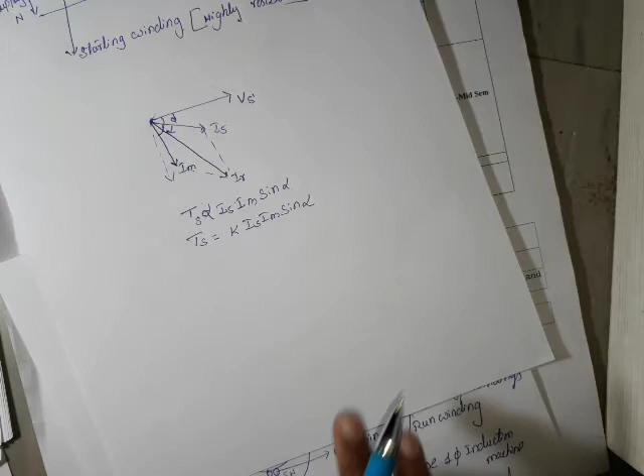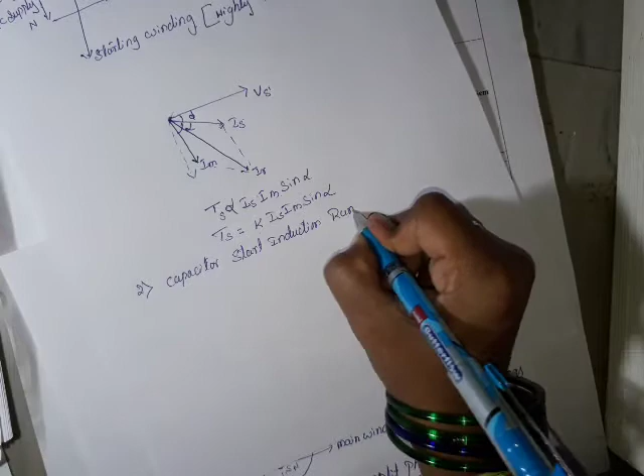So the next type of machine is capacitor start induction run induction machine. It's very simple.

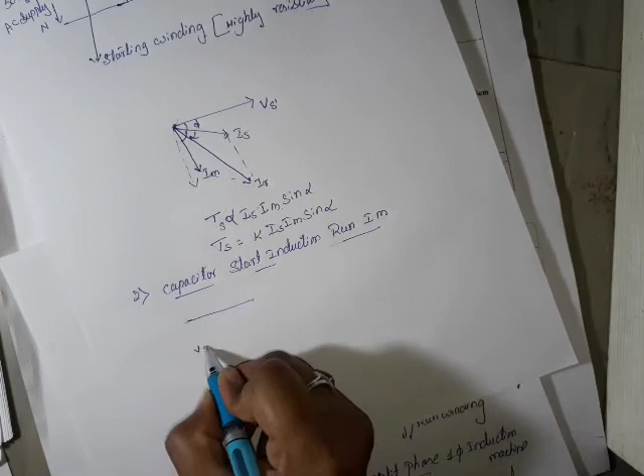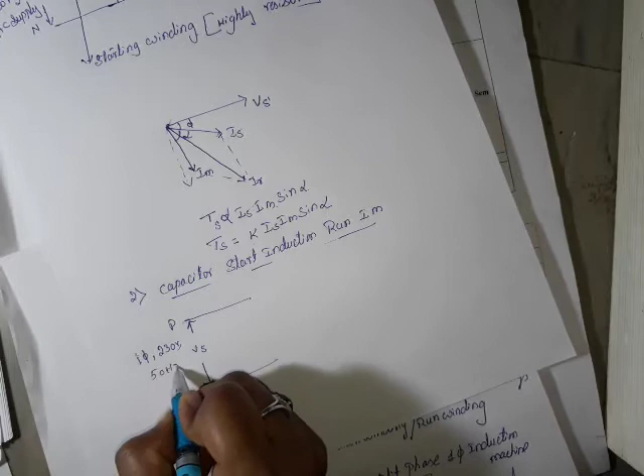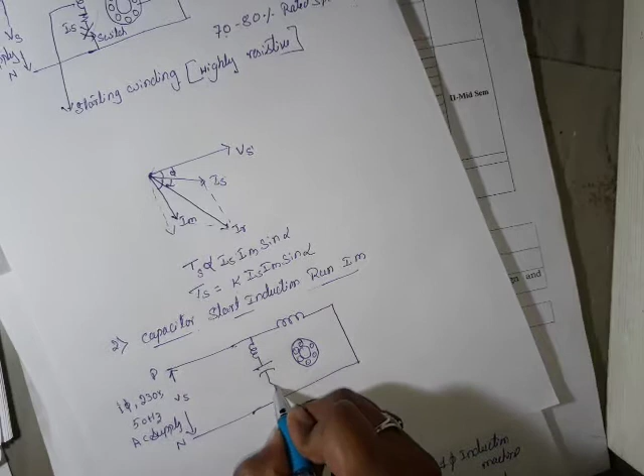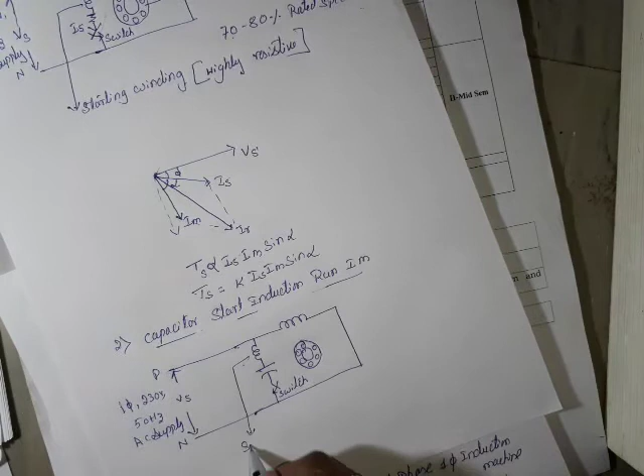First I'll write the circuit diagram. Vs - single phase neutral, 230 volts, 50 hertz AC supply we are going to give. Similar to split phase, here we have main winding, here we have rotor, here we have starting winding, but the starting winding is connected in series with the capacitor along with the centrifugal switch. So this is the switch, this is the starting winding, this is the main winding.

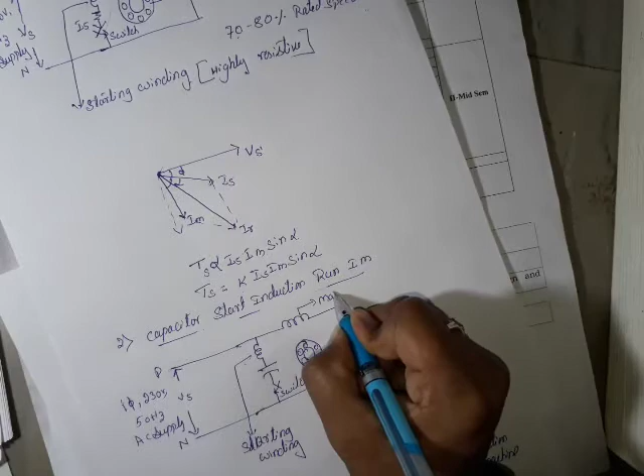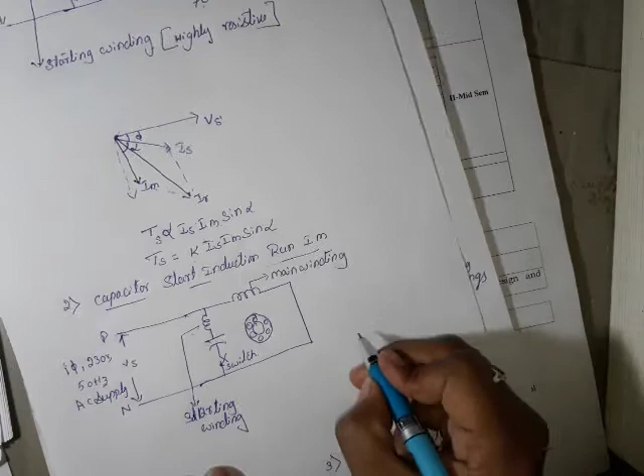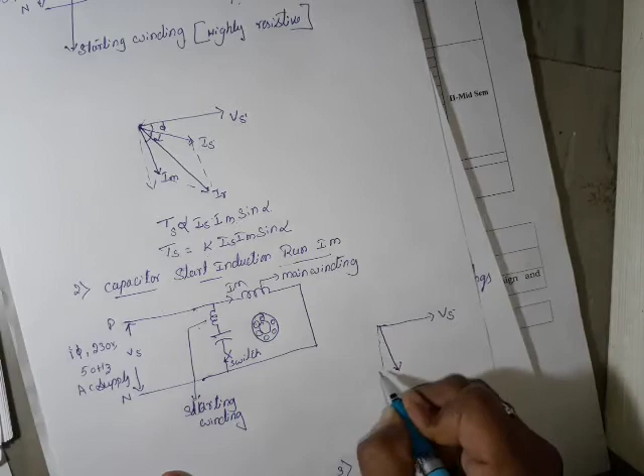Now we'll write the vector diagram so you will understand the working. This is the supply voltage Vs. The current flowing through the main winding is Im. Im is like this, it is not exactly 90 degrees, it is less than 90 degrees. Where can I write the current Is?

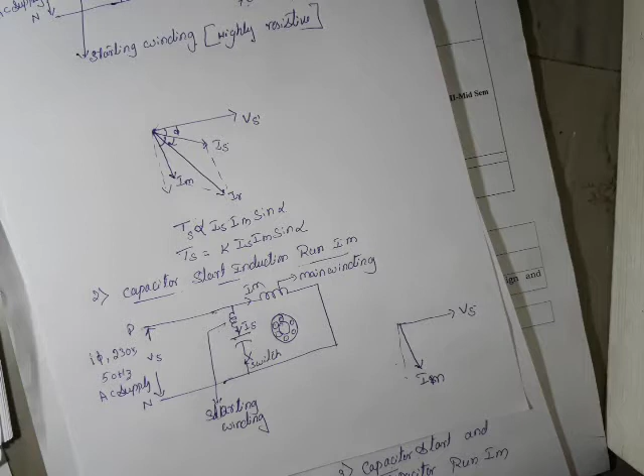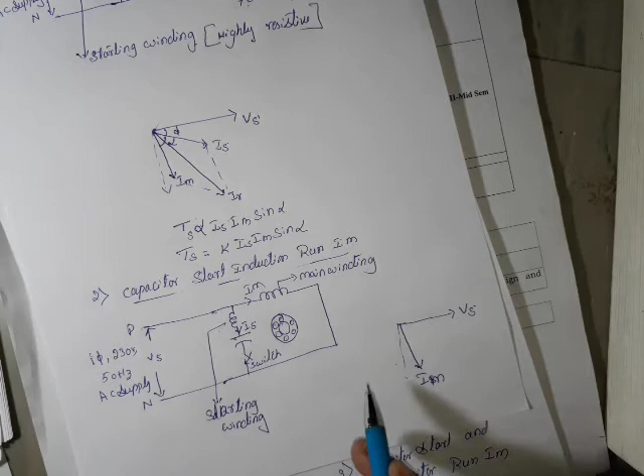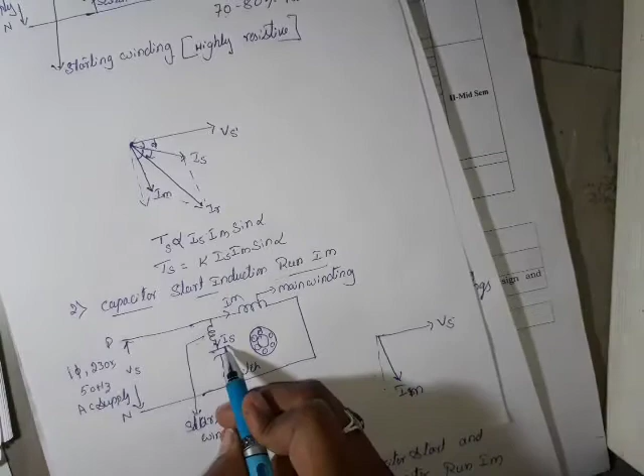As we know, in case of capacitive circuits, voltage lags behind the current. In case of inductive circuit, current lags behind the voltage. Means the current Is leads the voltage by some angle, I don't know what that angle is. So here the current Is is lagging behind the voltage since it is inductive. So here we have capacitive, obviously the current leads the voltage. So I have to write the current here, this is the current Is.

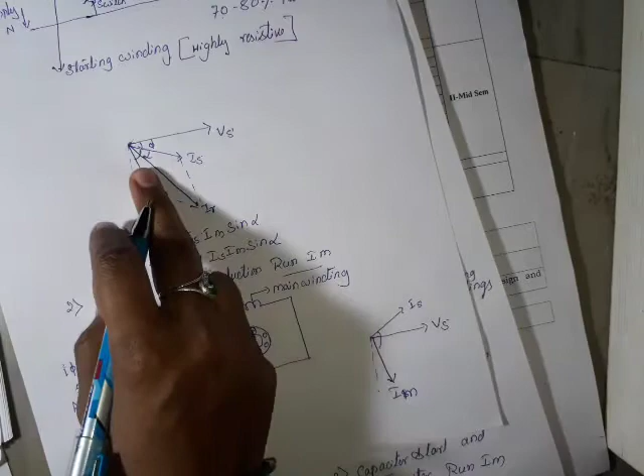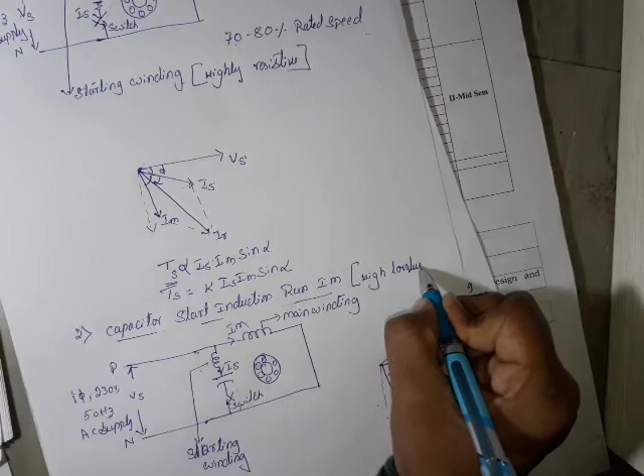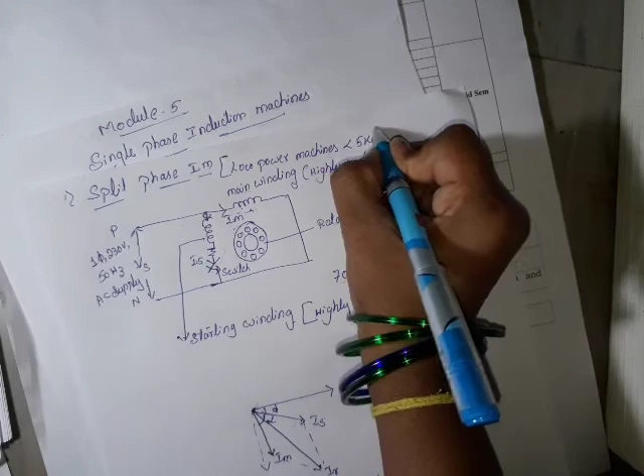Now what happens? Compared to split phase, the value of alpha increases. When the value of alpha increases, starting torque also increases. So this can be used for high torque machines. This type of machine is used for low power machines, meaning less than 5 kilowatts. So this can be used for greater than 5 kilowatts.

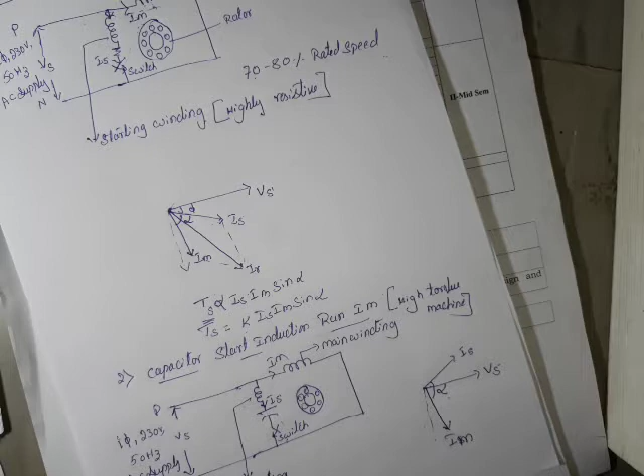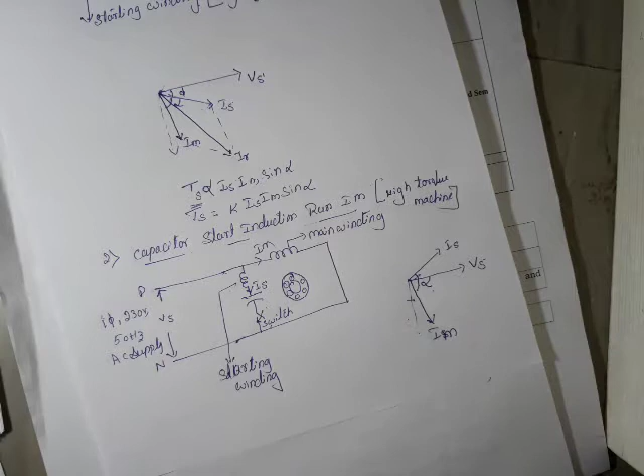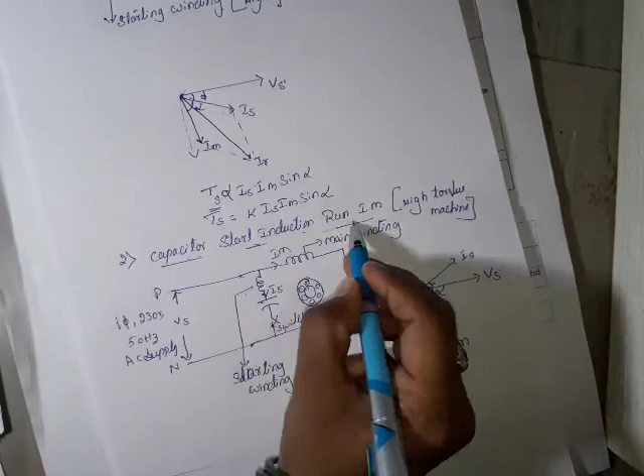So that's it, remaining working principle is same as split phase. But the only thing is we are inserting a capacitor with the starting winding so that the starting current leads the voltage, so the angle alpha increases and the torque produced also increases. So this is a capacitor start induction run machine. Later, once the motor picks up its speed, we are going to remove the centrifugal switch so that this capacitor is disconnected. That's why the name is capacitor start induction run - it is running with the main winding itself, which is highly inductive. So it is a capacitor start induction run machine.

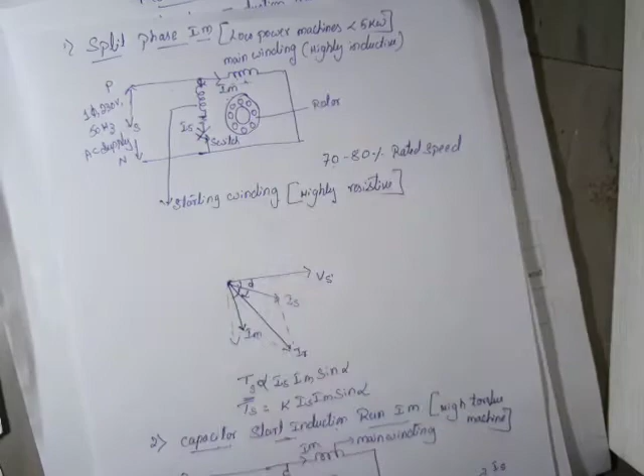So this is split phase induction machine. Why is it called split phase? Because we are splitting the phases - here we have one phase, here we have another phase. That's why it is called split phase induction machine.

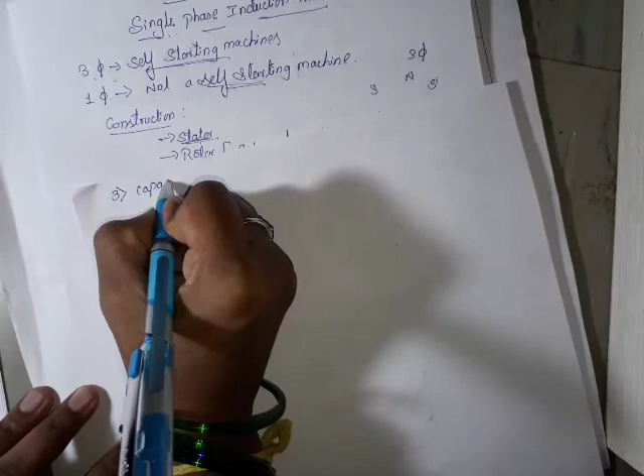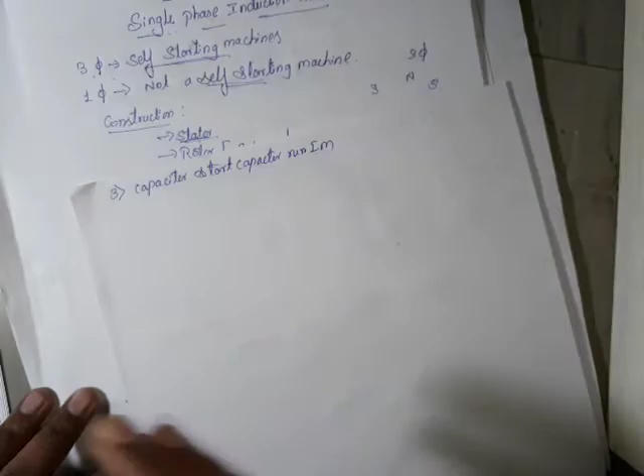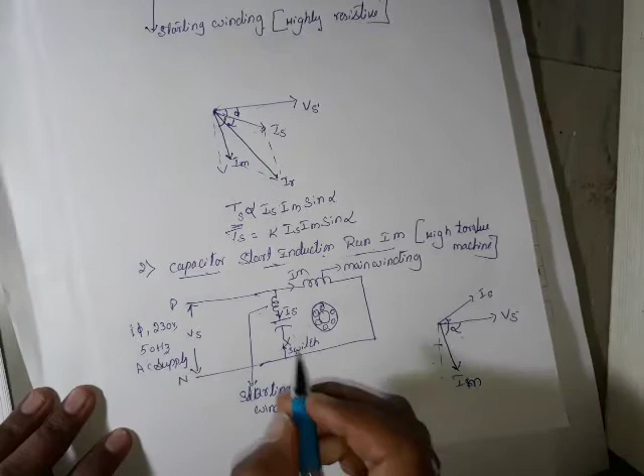And one more type of single phase machine is capacitor start, capacitor run induction machine. So nothing changes, this is same as the previous one. But what we are doing is, we are not removing the switch once the motor picks up its speed. The capacitor will be there in the circuit itself. Working, everything will be the same.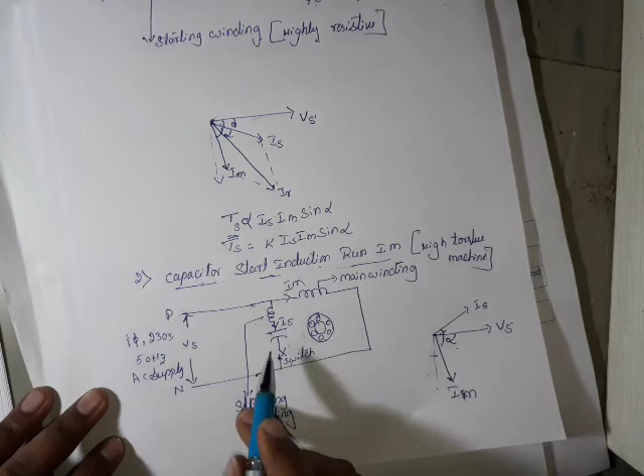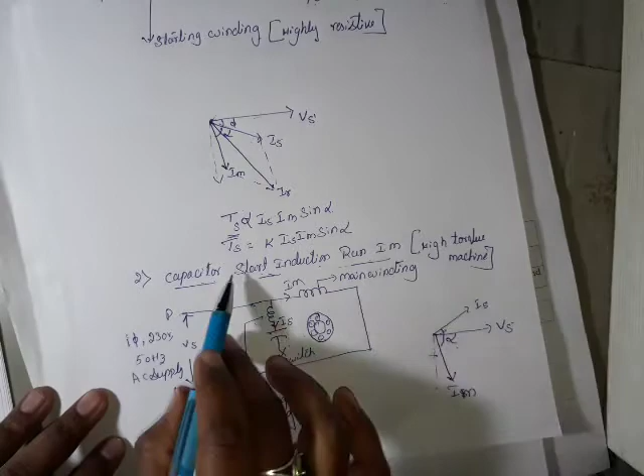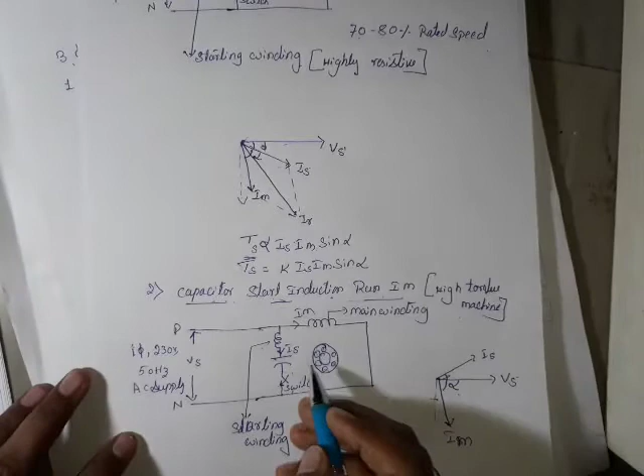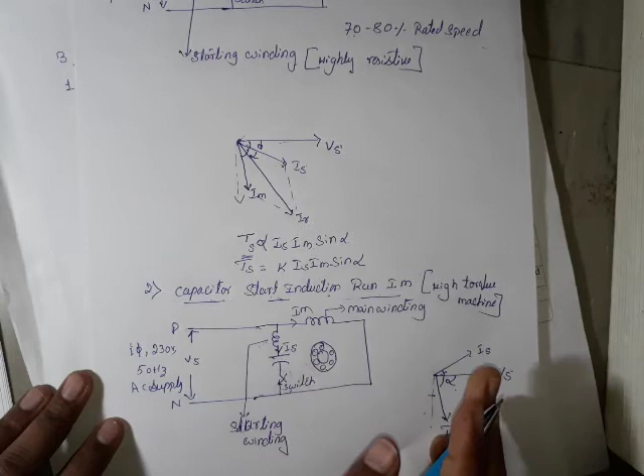It has its own peculiar application. In certain applications, we need to keep the capacitor inside the motor while the motor is running. That's why it is called capacitor start, capacitor run. The only change from the capacitor start induction run machine to the capacitor start capacitor run machine is the centrifugal switch is absent. So in this type of machine, centrifugal switch is absent, so that during starting the capacitor will be there in the circuit, and during running the capacitor will also be there in the circuit. In case of the other type of motor, only during starting the capacitor will be there - while running condition, the capacitor we are going to remove using the centrifugal switch. Okay, this is the working of single phase induction machine.